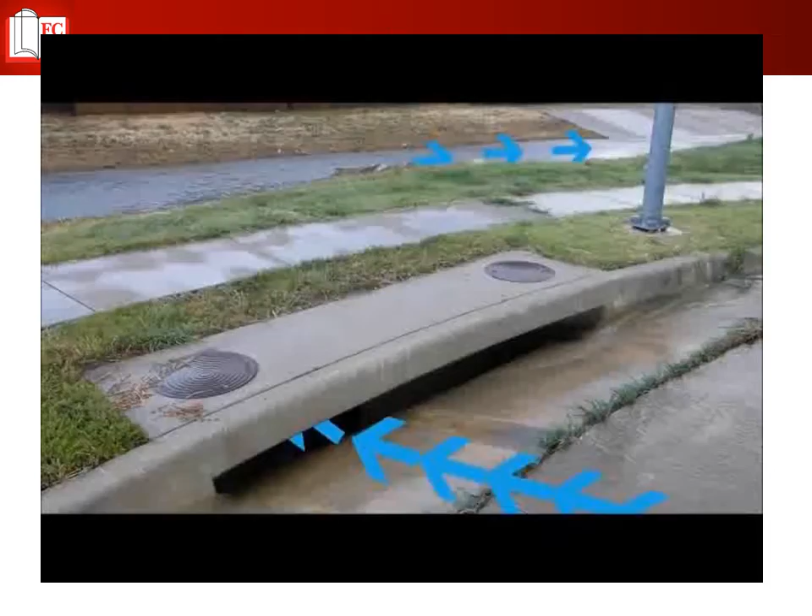Okay, who knows what this is? That's a storm drain. What about this? Yep, another storm drain. You see, a storm drain's job is to keep the streets from flooding when it rains. But where does all that water go? Storm drains carry the water away from the streets and parking lots into the nearest creek, river, or lake, which is where I live.

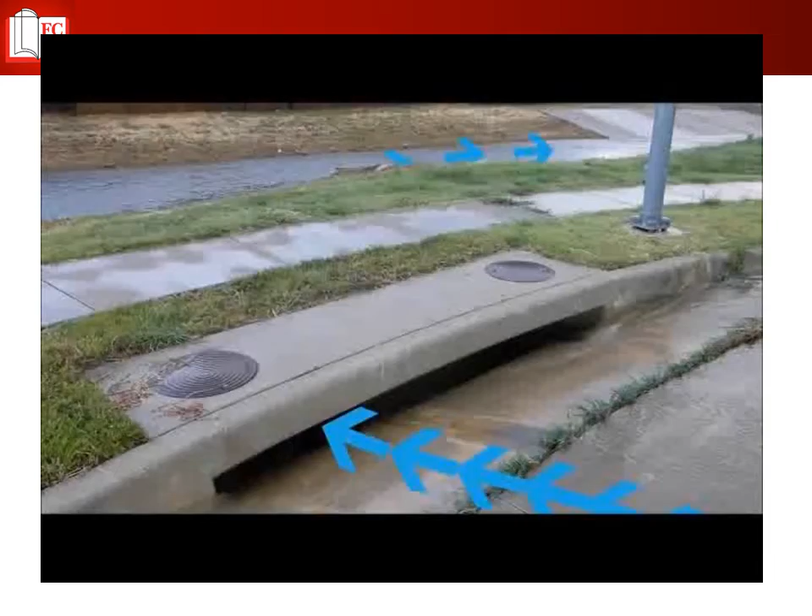Now, these drains are different from the drains inside your home that carry wastewater from your sink, shower, and toilet. Those drains connect to pipes that go into the sewer system and to a huge cleaning facility where the water is cleaned and treated before it's released into the stream. But storm drains send water straight into the creek, river, or lake. That water doesn't get cleaned. These two drains are not the same.

Only rain should go down the storm drain. Say that with me: only rain down the storm drain. And that is one reason why it is so important not to litter.

You see, when it rains, all the stormwater that runs off of rooftops, yards, parking lots, and roads picks up litter, dirt, oil from leaky cars, and other bad stuff that is laying on the ground. Then where does all that bad stuff go? The stormwater carries it right into the storm drain and right into my home, making it difficult for me and my friends to live. I don't want to swim in that, and I bet you wouldn't either. Yuck!

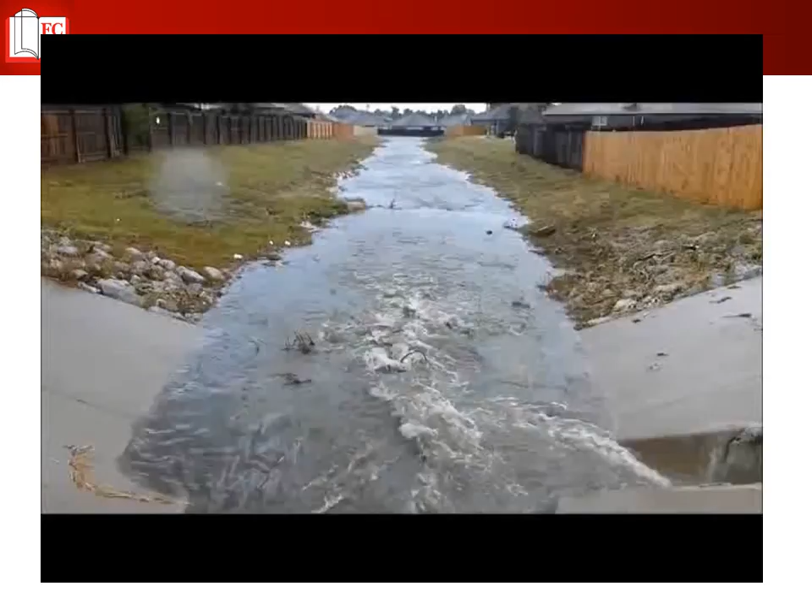But often, people litter or pollute our waters without even knowing it. Did you know that leaving grass clippings in the street after mowing the lawn can cause pollutants to go down the storm drain and into a stream? Leaving your pet's waste on the ground, or even just washing your car, are other ways that cause pollutants to end up in our waters. It is up to everyone to do their part to help keep our waters clean.

So what can you do? Should you put your garbage in the trash can or recycle bin? Yeah! Should you pick up after your dog? Yeah! Should leaves and grass clippings get picked up and not left in the street? Yeah!

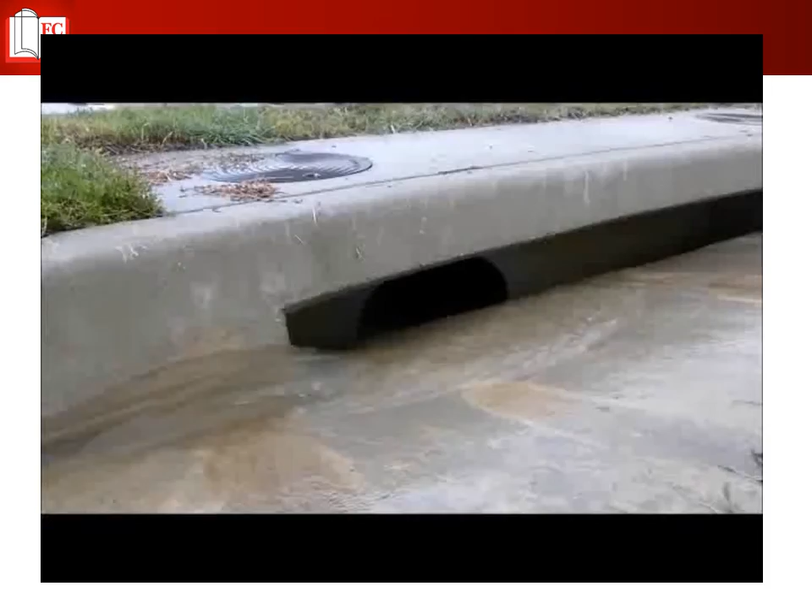Help make sure only rain goes down the storm drain. Don't litter, and don't put leaves and grass clippings in the street or down the drain. Do pick up after your dog. Say it with me: only rain down the storm drain.

Section 1. Stormwater Basics.

Stormwater runoff is a natural process and an important aspect of the water cycle. In the natural course of events, after rain or another form of precipitation falls to the land surface, the following may occur: evaporation, infiltration, runoff.

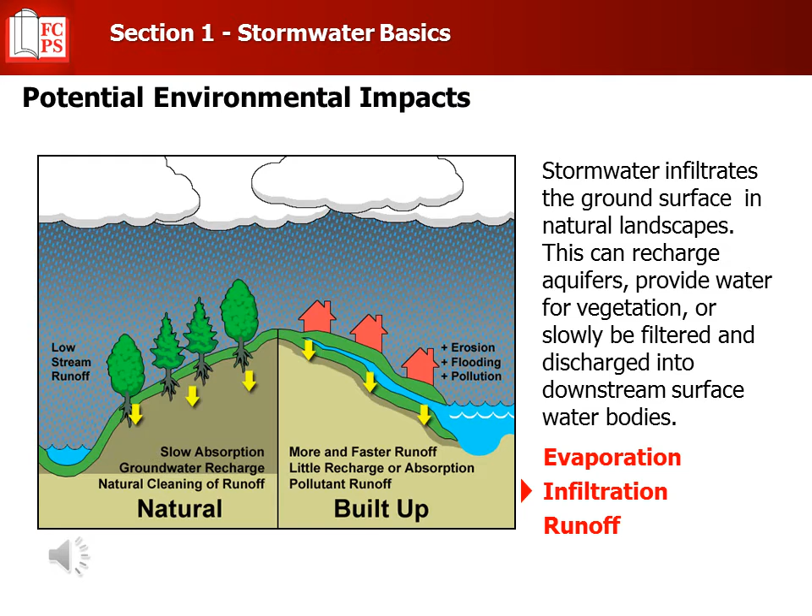Runoff: When development leaves few natural surfaces, stormwater tends to run off the surface at a high rate. This runoff provides little time for natural cleaning by percolation and tends to carry pollutants from the surface to surface water bodies.

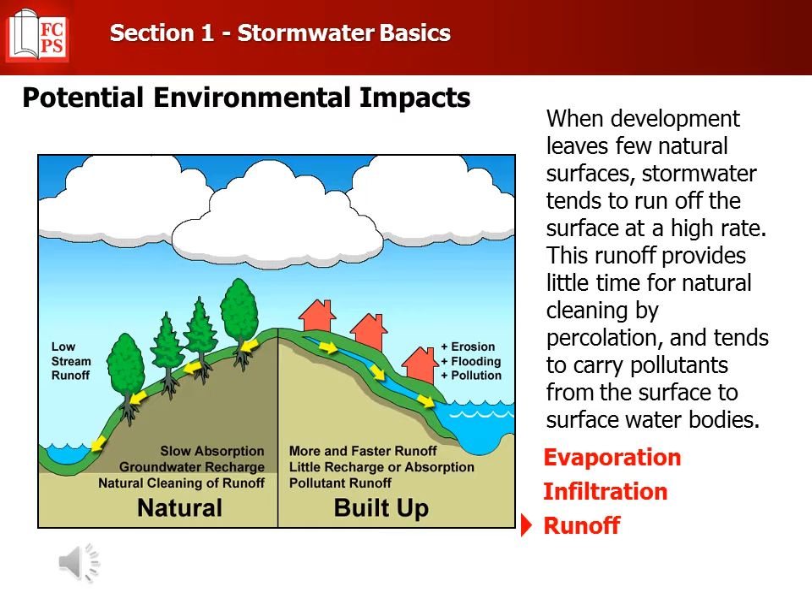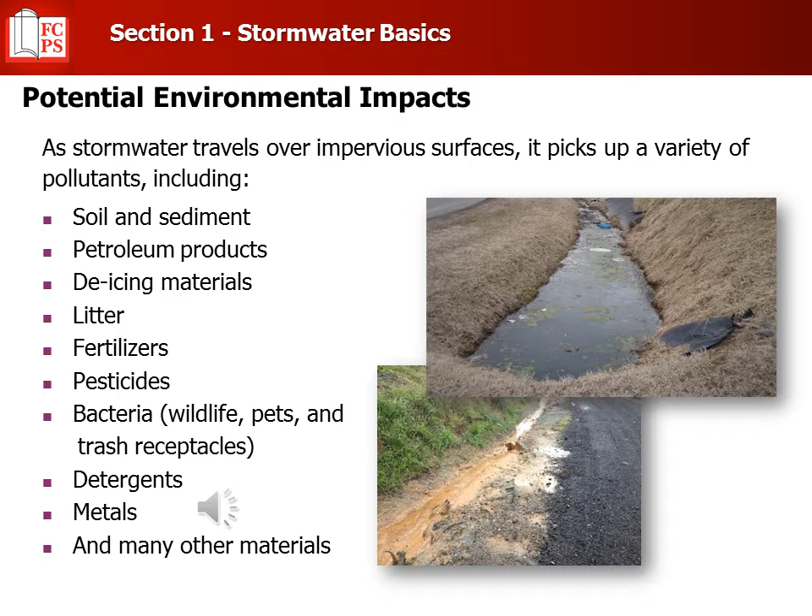Potential environmental impacts: As stormwater travels over impervious surfaces, it picks up a variety of pollutants including soil and sediment, petroleum products, de-icing materials, litter, fertilizers, pesticides, bacteria, detergents, metals, and many other materials.

Stormwater runoff is considered by many to be one of the most significant sources of pollution of our nation's surface waters. The National Water Quality Inventory 2000 report to Congress reported that the leading source of water quality impairment on a nationwide basis was stormwater runoff from urban and agricultural land.

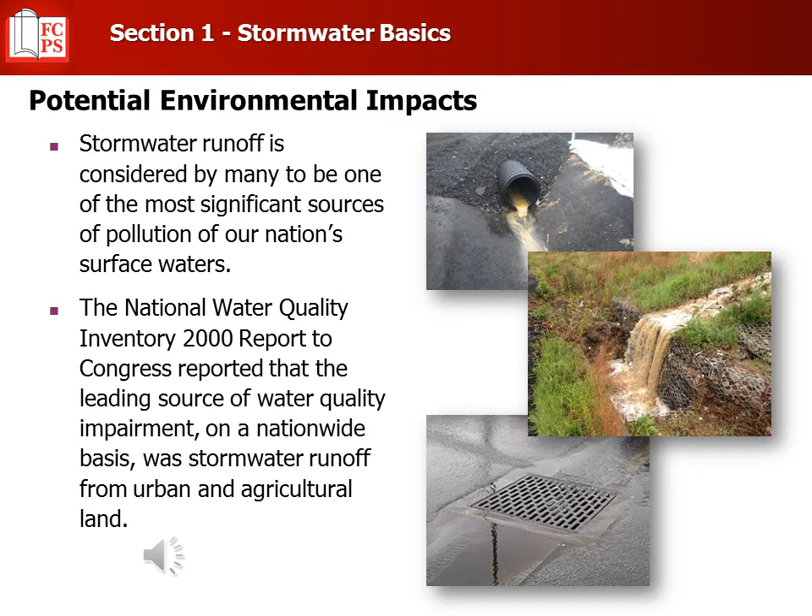Municipal Separate Storm Sewer System, also known as MS4. The 1987 amendments to the Clean Water Act regulate stormwater discharge from the Fairfax County Public Schools drainage system, or MS4. The Department of Environmental Quality administers the program in Virginia. MS4 is a man-made method of channeling stormwater runoff, owned or operated by a public body, designed or used for collecting or conveying stormwater, that is not a combined sewer and is not part of a publicly owned treatment works.

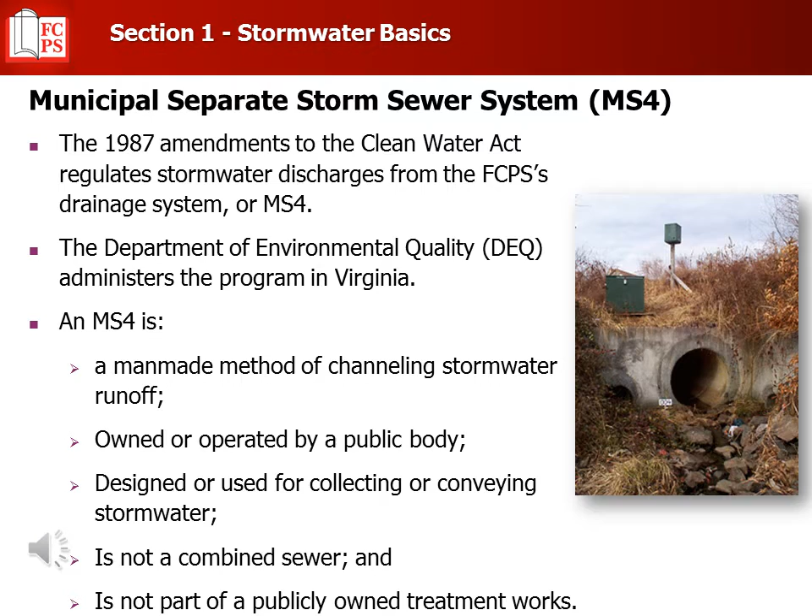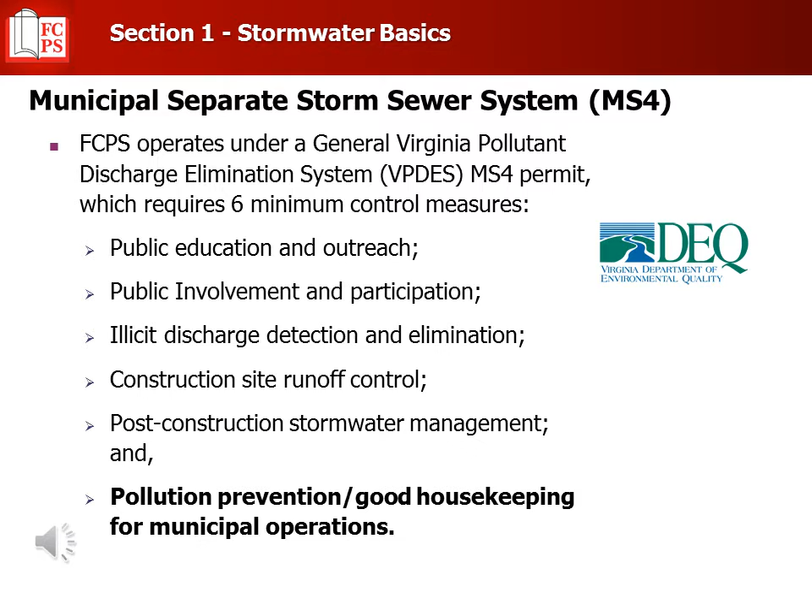Fairfax County Public Schools operates under a General Virginia Pollutant Discharge Elimination System MS4 permit, which requires 6 minimum control measures: public education and outreach, public involvement and participation, illicit discharge detection and elimination, construction site runoff control, post-construction stormwater management, and pollution prevention/good housekeeping for municipal operations.

You have now completed Section 1, Stormwater Basics. Now we will move on to Section 2, Equipment, Maintenance, and Washing.

Section 2, Equipment, Maintenance, and Washing Standard Operating Procedures. What is the risk? Improper maintenance and washing procedures can discharge various pollutants to surface waters, including heavy metals and detergents.

Pollutants can include petroleum products, sediment, antifreeze, battery acids, and other automotive fluids. This can create conditions that are harmful to human and aquatic health, and also may constitute a violation of Fairfax County Public Schools' MS4 permit.

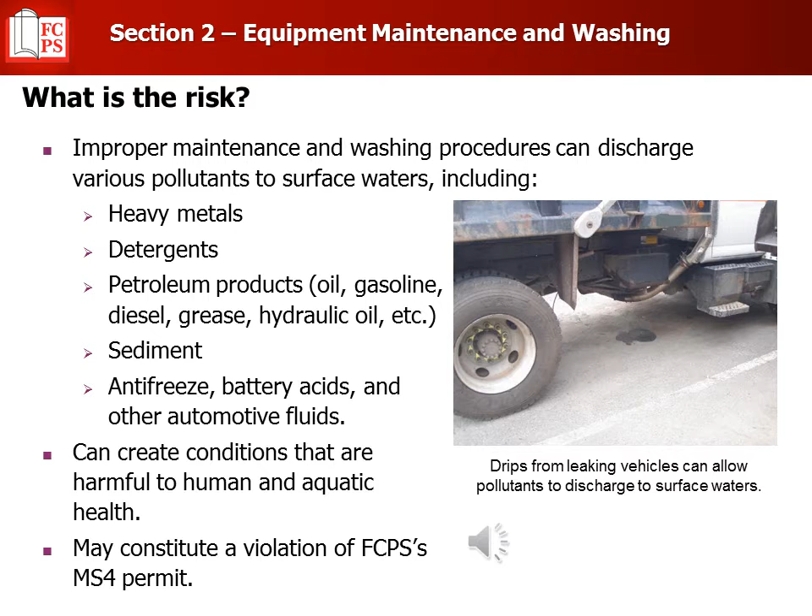Vehicle maintenance procedures: Conduct maintenance activities inside to the extent possible. For vehicles awaiting maintenance, locate them in a designated area away from storm drains. Provide drip pans under leak-prone vehicles, and periodically inspect the area for drips and leaks. As you can see in the photo, if left unaddressed, leaking vehicles can cause a significant pollution threat.

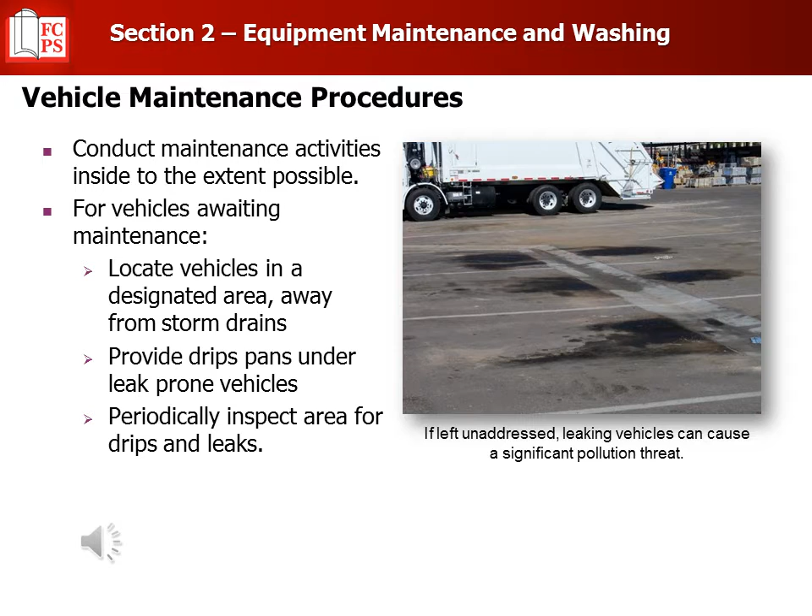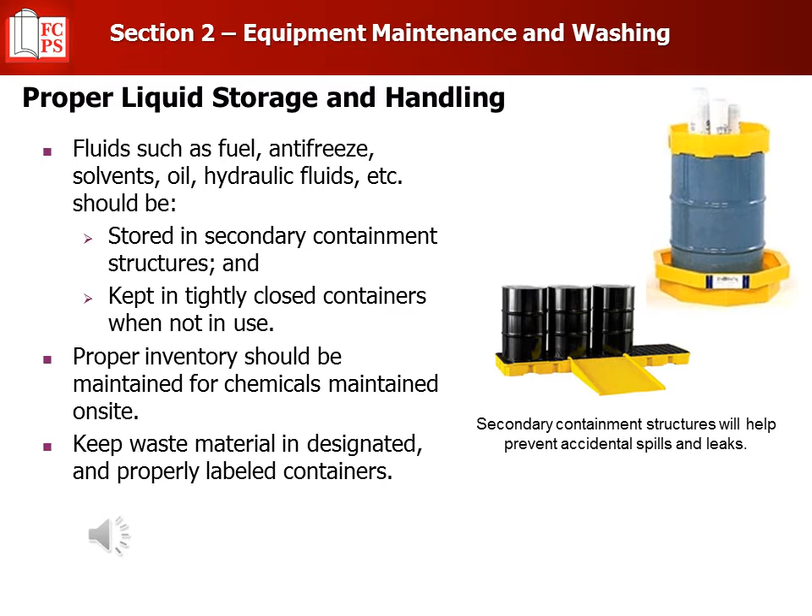Proper liquid storage and handling: Fluids such as fuel, antifreeze, solvents, oil, hydraulic fluids, etc. should be stored in secondary containment structures and kept in tightly closed containers when not in use. Proper inventory should be maintained for chemicals kept on site, and waste material should be kept in designated, properly labeled containers. As shown in the pictures, secondary containment structures will help prevent accidental spills and leaks.

General considerations: Sweep maintenance areas periodically to prevent buildup of pollutants. Inspect equipment regularly for signs of drips and leaks. Provide trash receptacles in maintenance areas and routinely dispose of accumulated trash. Wash parts in approved locations. Avoid the use of solvents where possible. Properly dispose of liquid and solid waste material in accordance with applicable regulation and/or label requirements.

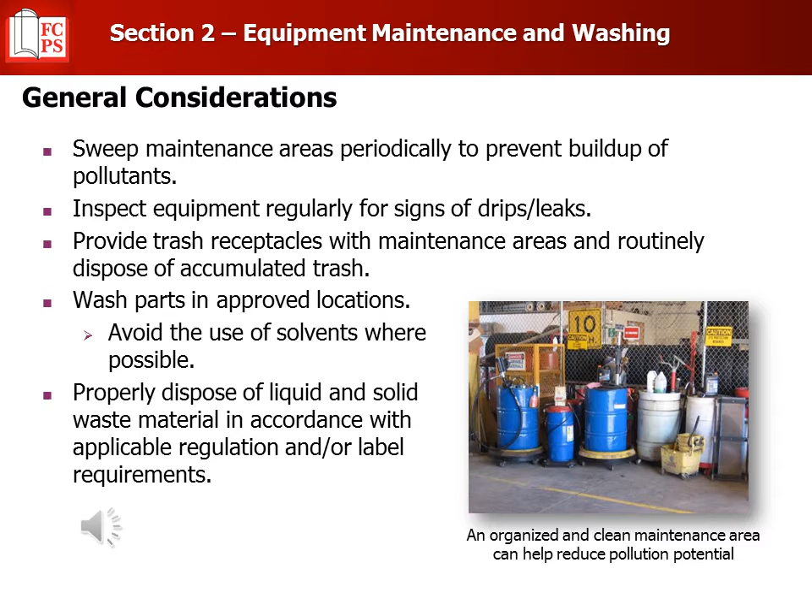Equipment washing procedures: Use only approved washes that either contain all wash water or discharge to the sanitary sewer. If an approved wash is not available, take equipment to a commercial wash facility with which Fairfax County Public Schools has an existing contract. Simple washing may be conducted on grassy areas provided no soaps or detergents are used, wash water is able to soak into the ground and not run off, and salt, oil, fuel, or other harmful substances are not present and at risk of being washed from the equipment.

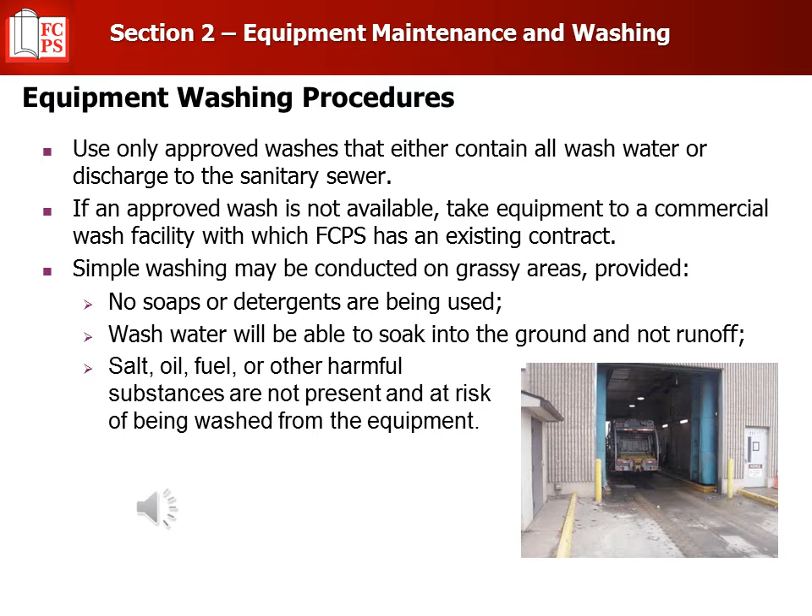Equipment wash operation and maintenance. Equipment wash facilities must be adequately plumbed in accordance with county requirements.

Proper signage should be provided to clearly indicate where washing should be conducted. Signage must also be provided on all spigots to remind personnel where washing activities should be conducted.

Accumulated sediment should be routinely removed from the wash area. All wash systems should be regularly maintained in accordance with manufacturer or industry standards. See the Equipment Maintenance and Washing Standard Operating Procedures for additional control measures.

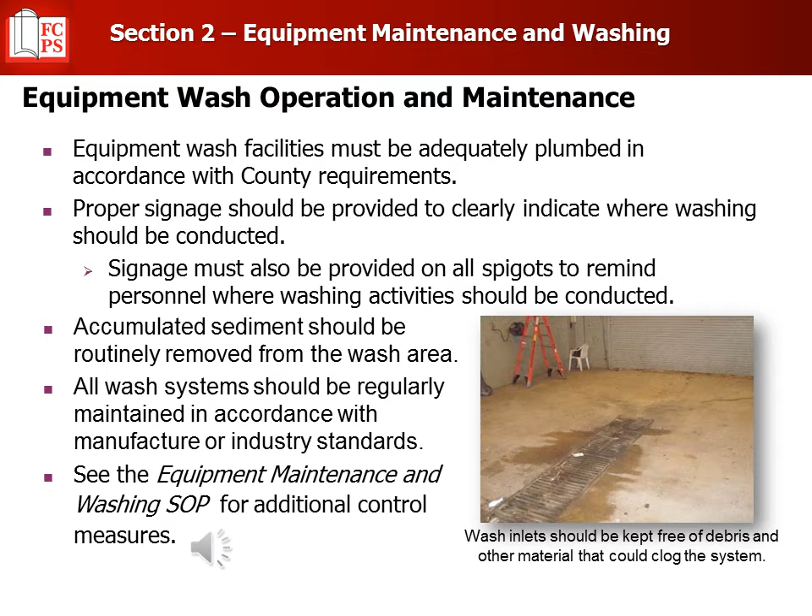You have now completed Sections 1 and 2. Now we will cover Section 3, Landscaping and Grounds Maintenance. Section 3, Landscape and Grounds Maintenance Standard Operating Procedures.

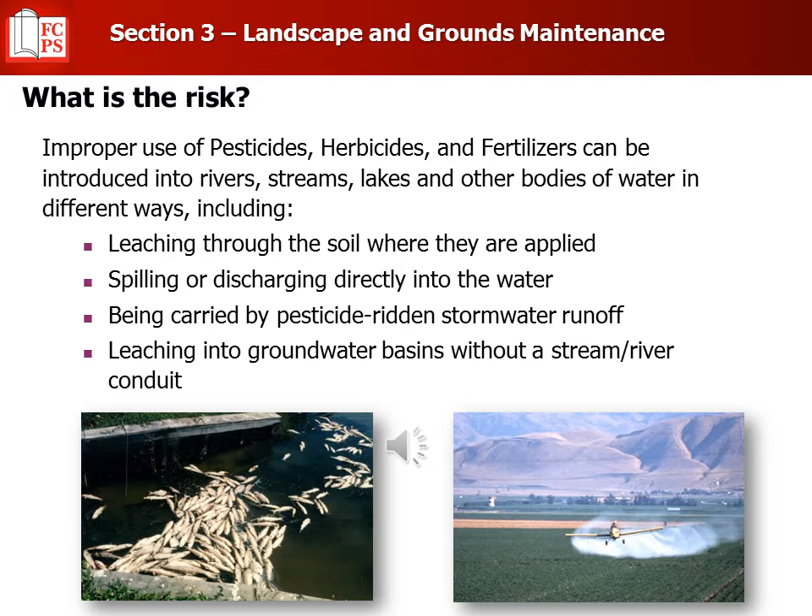What is the risk? Improper use of pesticides, herbicides, and fertilizers can be introduced into rivers, streams, lakes, and other bodies of water in different ways, including leaching through the soil where they are applied, spilling or discharging directly into the water, being carried by pesticide-ridden stormwater runoff, and leaching into groundwater basins without a stream or river conduit.

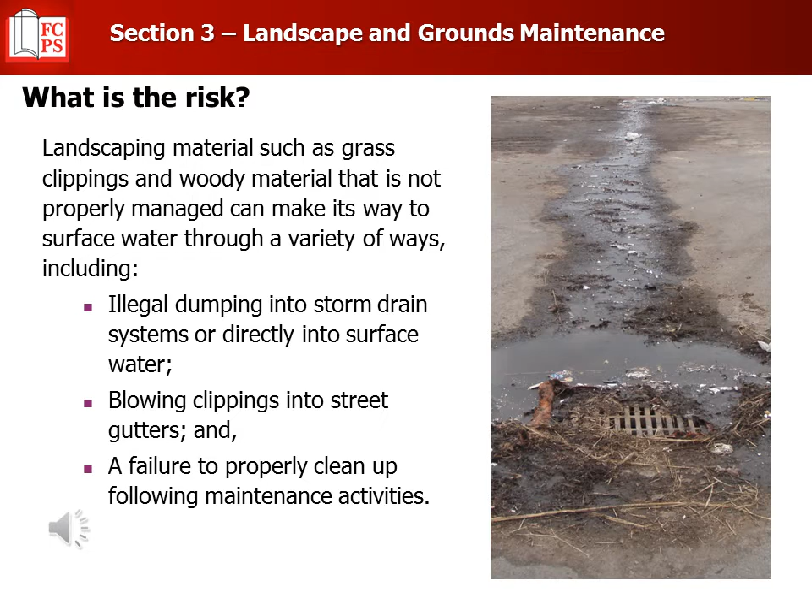Landscaping material such as grass clippings and woody material that is not properly managed can make its way to surface water through a variety of ways, including illegal dumping into storm drain systems or directly into surface water, blowing clippings into street gutters, and a failure to properly clean up following maintenance activities.

Impacts on bodies of water. Improper maintenance activities can create a harmful condition in the water body known as eutrophication. Fertilizer and organic material contamination of a water body results in increased nutrients in the ecosystem, which causes excess growth of plants and algae blooms that, in turn, reduce dissolved oxygen in the water.

Reduced levels of dissolved oxygen in the water can result in the death of microorganisms and fish. Pesticide can often be toxic to aquatic life in fairly low doses.

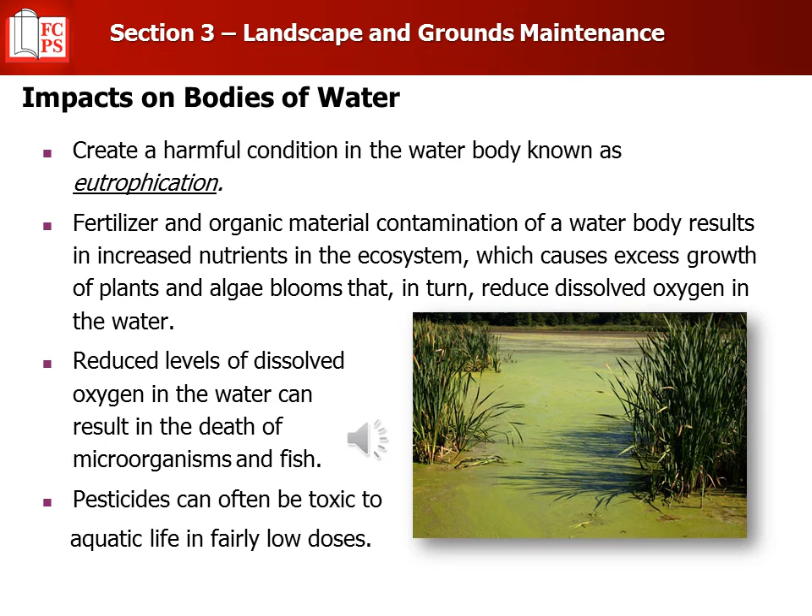Vegetation management. Regularly manage vegetation to minimize the amount of debris produced at any one time. Remove and dispose of debris daily. Conduct mowing operations during dry periods.

Inspect sidewalks, gutters, roadways, and other hard surfaces for clippings and other debris following maintenance operations, and remove material as necessary. Mulch grass clippings in place where possible. If clippings are collected, remove and dispose of them immediately following maintenance activities.

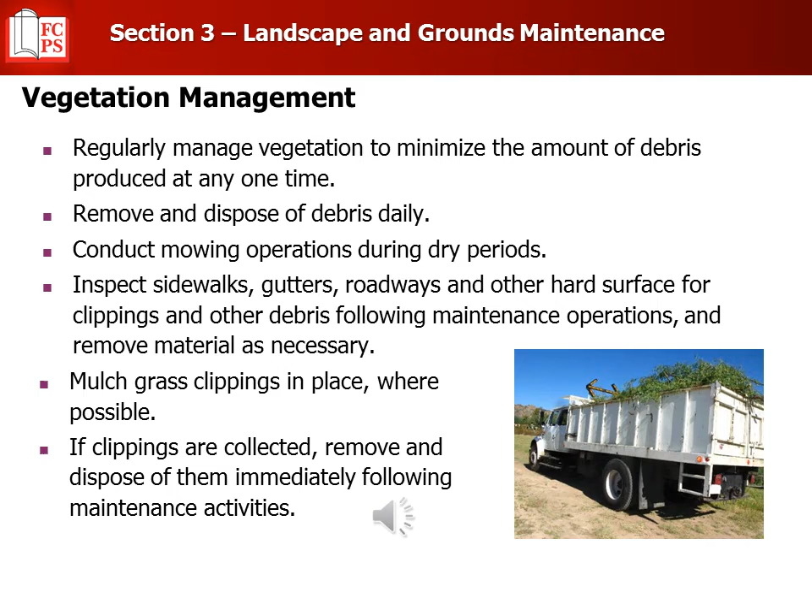Equipment management. Equipment should be inspected for leaks prior to each use, as well as before and after transport to a job site. When possible, fueling of handheld equipment should be done within secondary containment.

Maintenance equipment should be cleaned following each use. Cleaning should be done in accordance with the equipment maintenance and washing standard operating procedure.

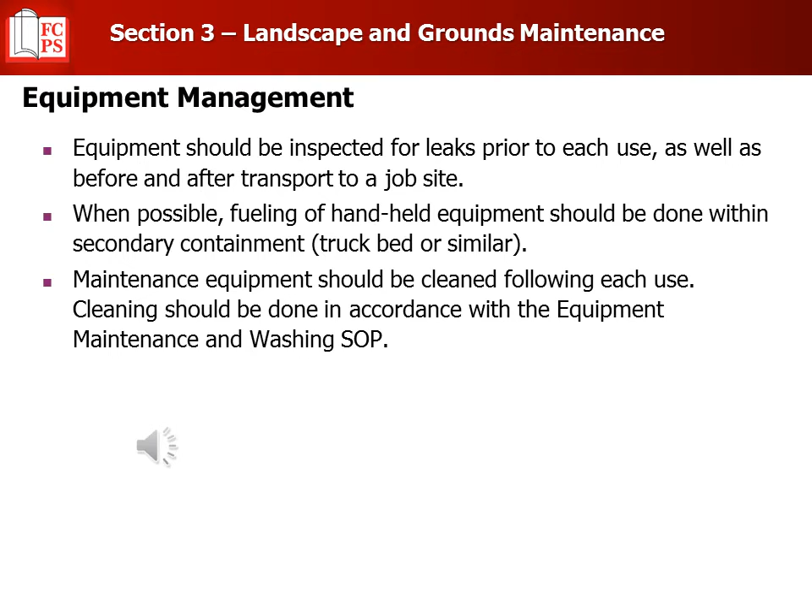Additional considerations. Pesticides and herbicides should only be applied by a licensed applicator. Integrated pest management techniques should be employed where appropriate. Irrigation should be done in a manner that minimizes runoff. See the Landscaping and Grounds Maintenance Standard Operating Procedures for additional control measures.

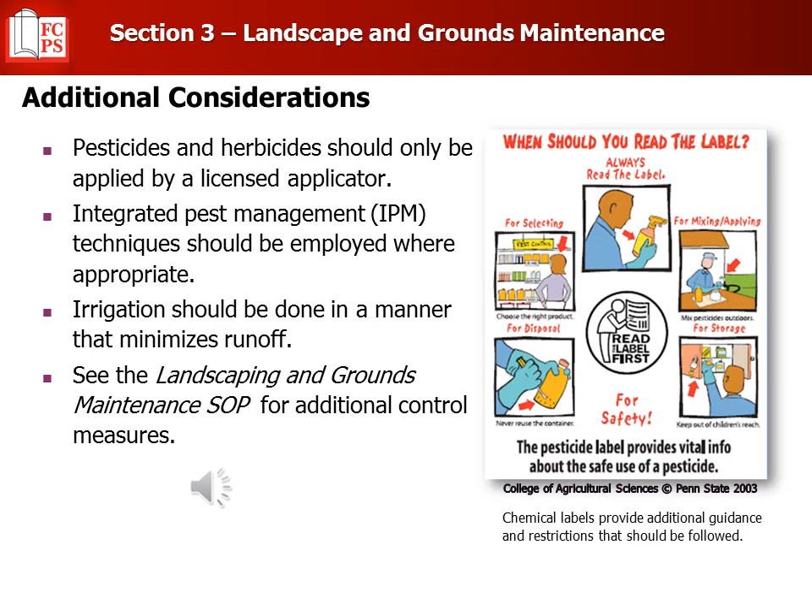Now we have completed 3 sections of this training. Now we will cover Section 4, Outdoor Material Storage. Section 4, Outdoor Material Storage Standard Operating Procedures.

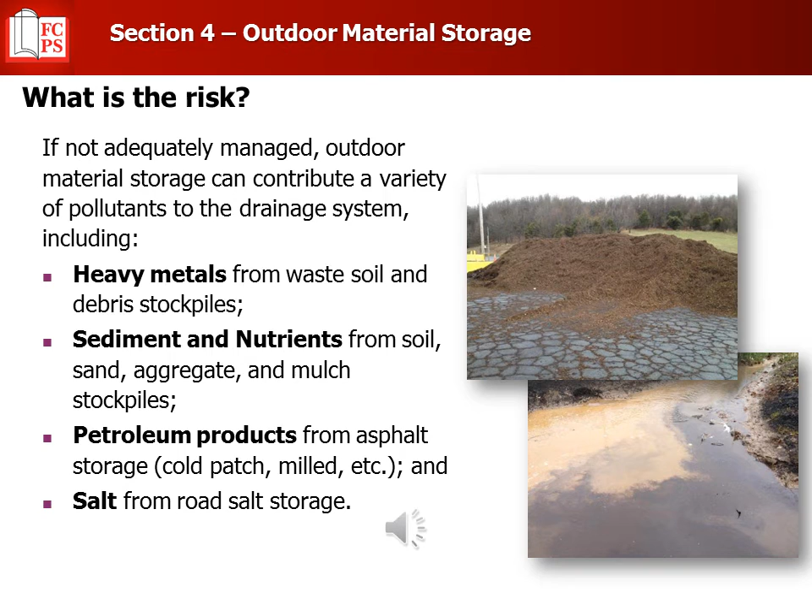What is the risk? If not adequately managed, outdoor material storage can contribute a variety of pollutants to the drainage system, including heavy metals from waste, soil, and debris stockpiles, sediment and nutrients from soil, sand, aggregate, and mulch stockpiles, petroleum products from asphalt storage, and salt from road salt storage.

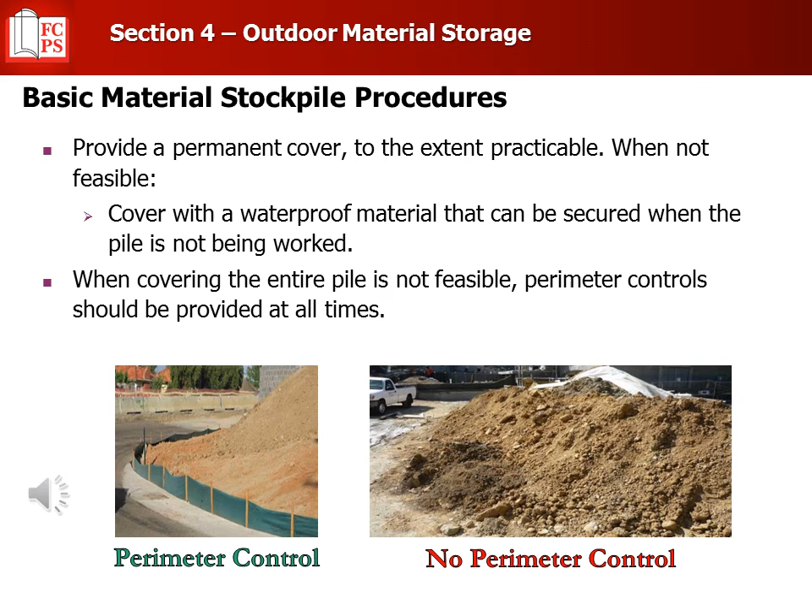Basic material stockpile procedures. Provide a permanent cover to the extent practicable. When not feasible, cover with a waterproof material that can be secured when the pile is not being worked. When covering the entire pile is not feasible, perimeter controls should be provided at all times.

Locate storage piles at least 25 feet from storm drain inlets or other drainage conveyances. Permanent storage areas should consist of a 3-sided structure to provide permanent containment. Salt must be stored on an impervious surface with adequate cover and perimeter control.